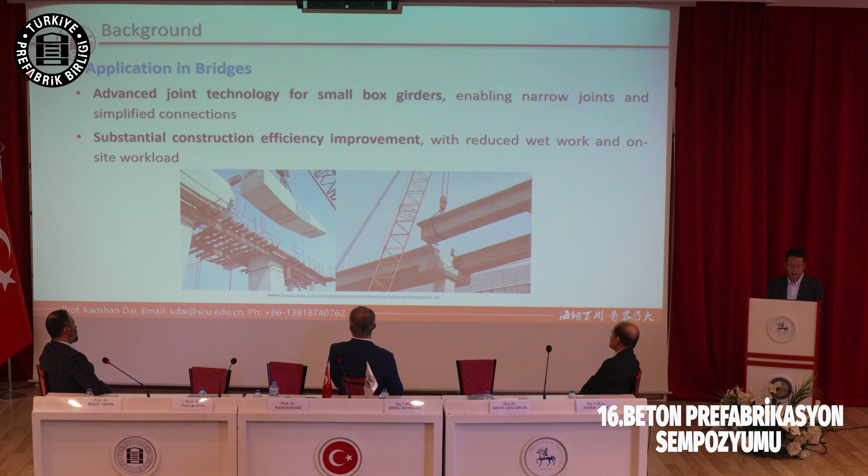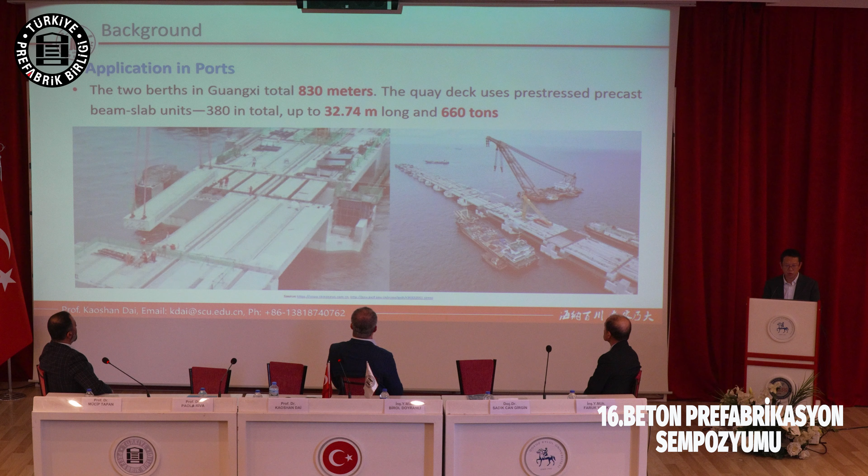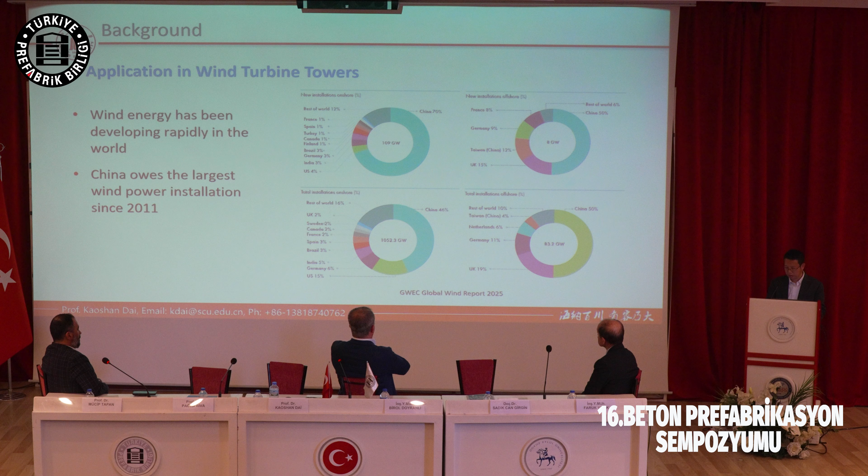And besides buildings, prefabricated concrete is actually used widely for transportation infrastructure, especially bridges, like very busy roads, especially in cities. They use this technology to accelerate construction on site.

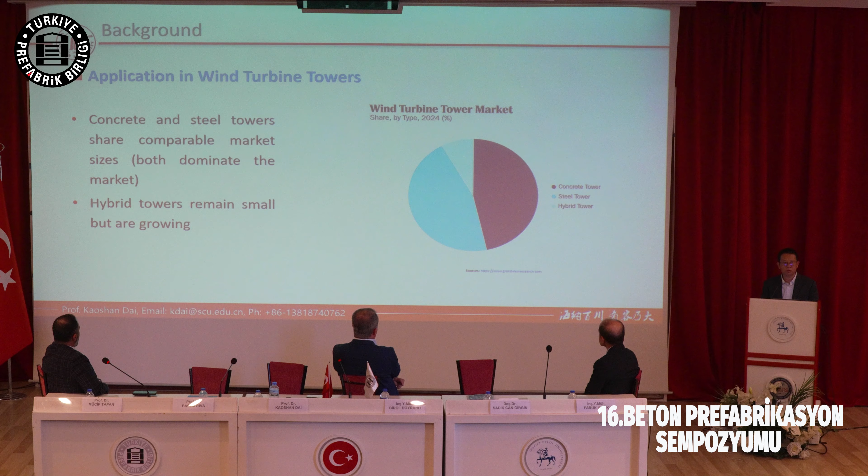And the reason is also that they can save some labor, and they also use this type of heavy crane, since the precast concrete components can be heavy.

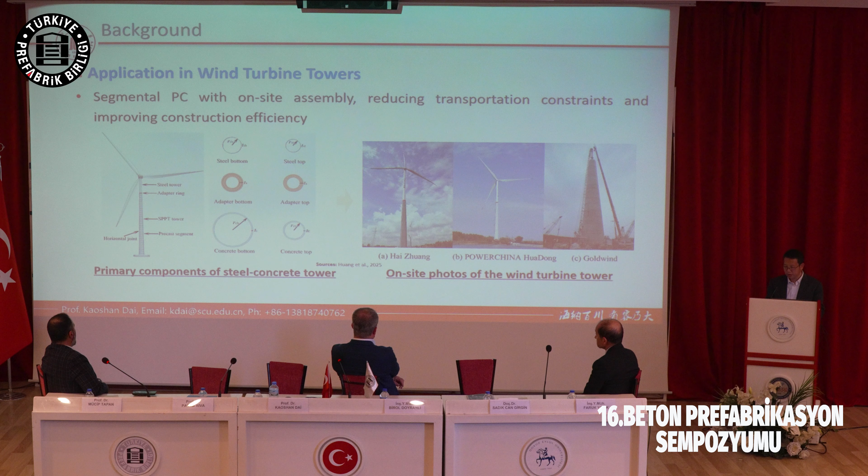I have been working on renewable energy infrastructure since I came back from the US and joined Tongji University in China in 2011. Actually, in that year, China became number one in the world for wind power installation. And this is a report from the Global Wind Report last year.

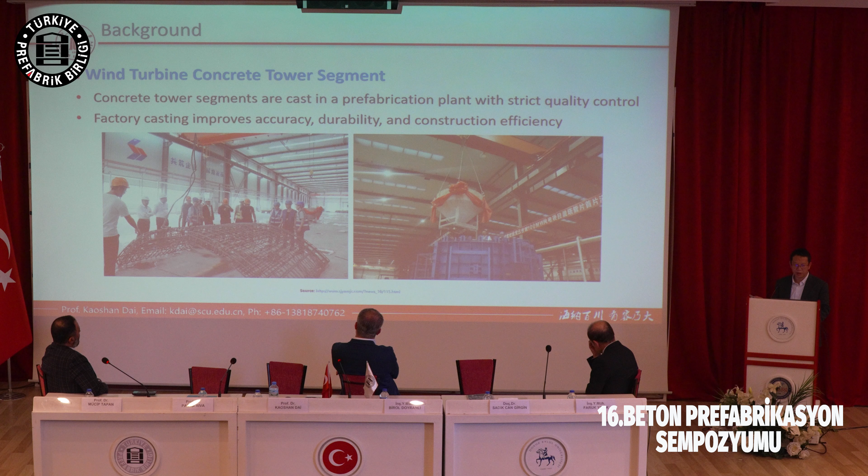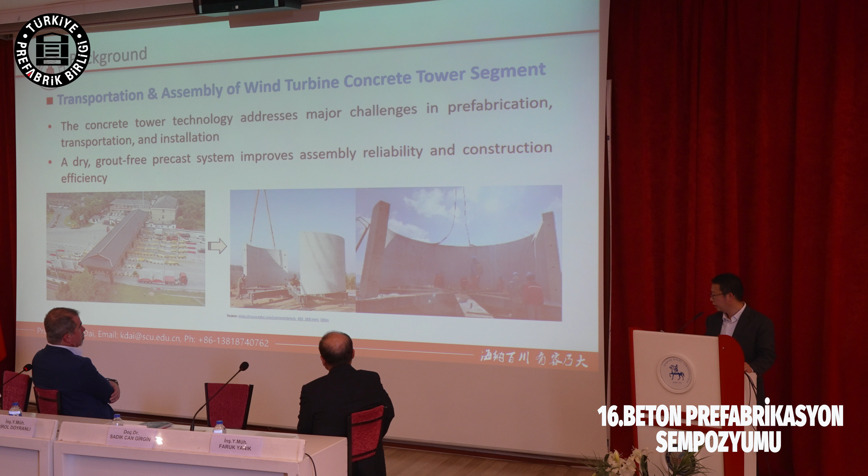And you can see from this figure, for both onshore and offshore wind energy, China has almost half of the world capacity. I studied this type of structure; at the beginning it was a steel tubular structure. And currently, as you can see from this figure, concrete towers have almost a comparable market share to steel towers.

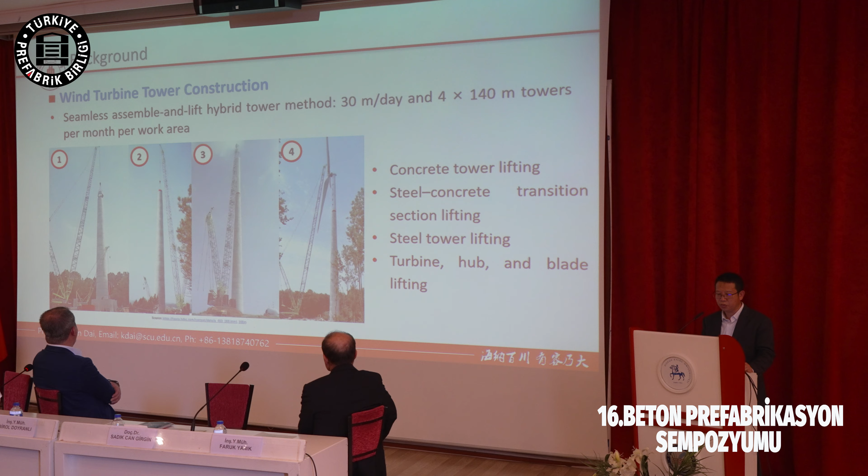The reason is the concrete tower is very cost-effective. That means it's very cheap compared to steel in China. And so when the building market for precast concrete went down a little bit, a lot of manufacturers switched to this type of renewable energy infrastructure. So their factories can still be fully operated, but the product will be like this, okay?

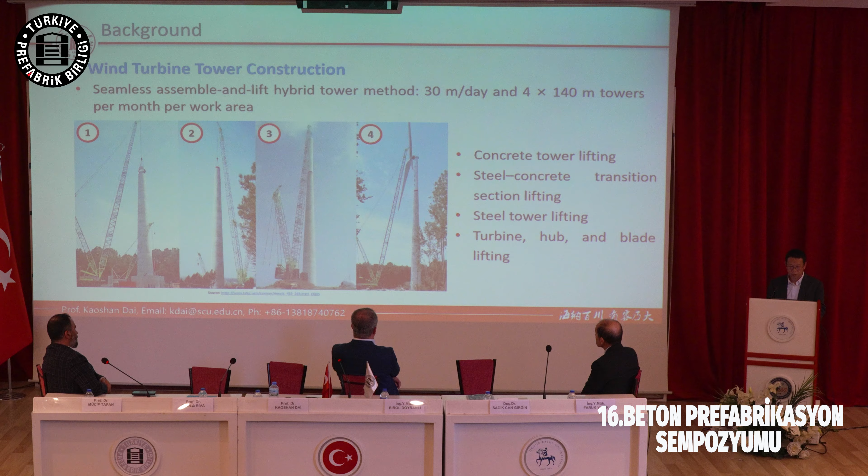So for the wind turbine tower, usually they'll have concrete at the bottom, almost 2/3 of the length of the tower, and at the very top they'll keep the steel.

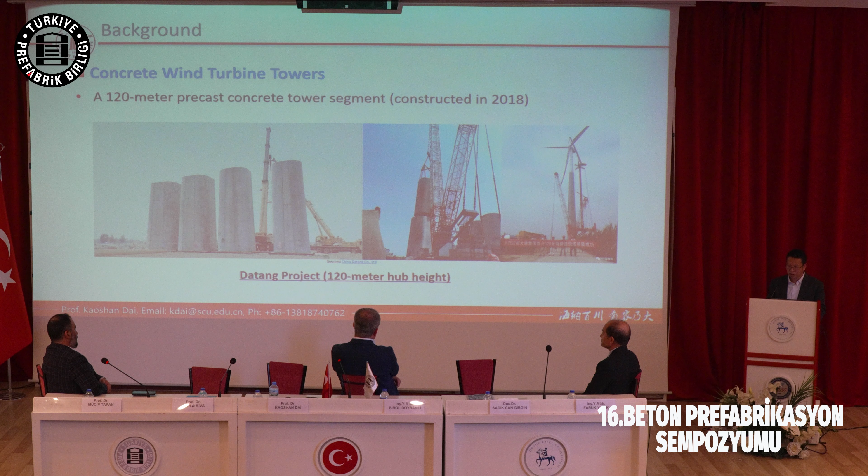And then between the steel and the concrete, there's a connection between them. And you can see from this figure, the construction still uses a crane. And this is a manufacturer or factory place.

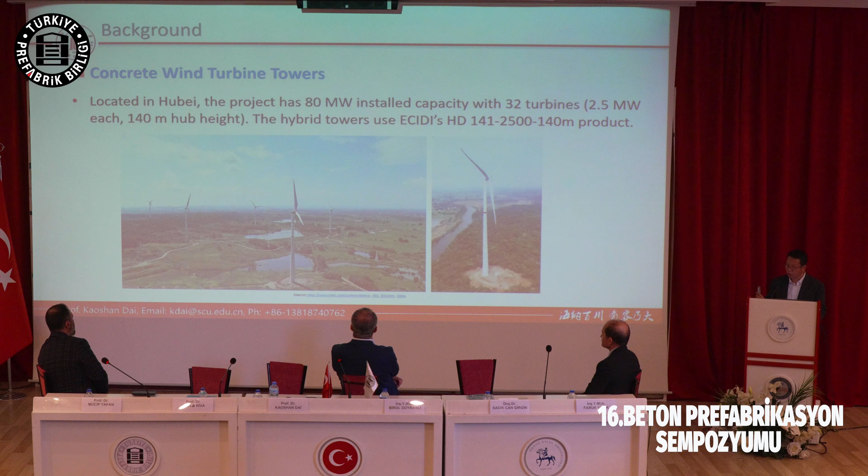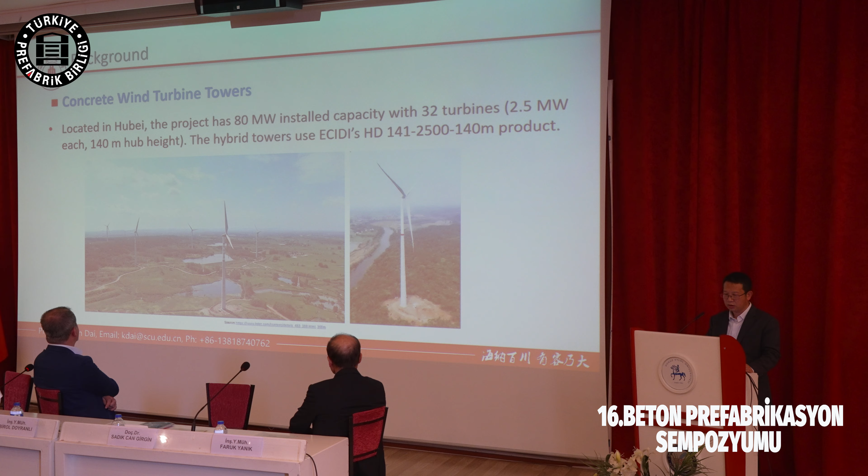And some of the companies' previous product is usually for the metro line tunnel, but with this requirement going down in China for metro line construction, they also use a different mode and try to manufacture this wind turbine concrete segment. And this is transportation and also the construction on the site.

At the very beginning, this technology, I think, was originally from a European country like Spain, but China right now has developed at least 10 types of structural system for the concrete part of the wind turbine. And they mostly will be precast and pre-stressed.

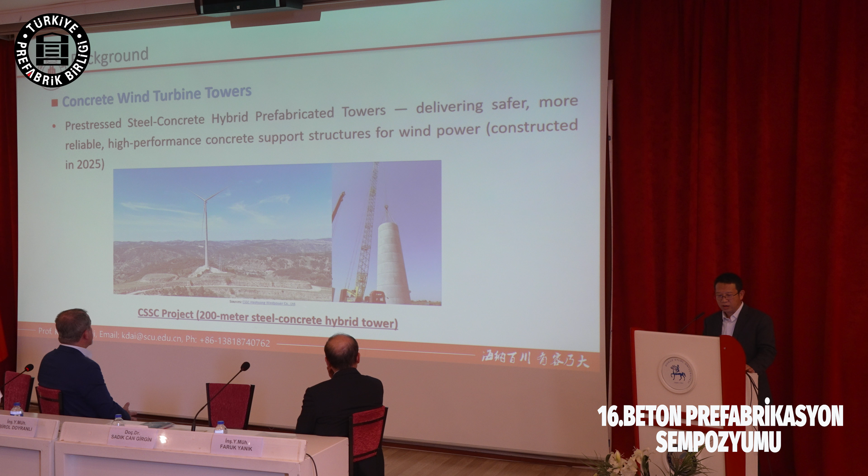This is the on-site assembling steps. Usually first you have the foundation, and then you use the crane to lift the concrete part, and then the steel part, and finally your turbine machine, hub, and the blade.

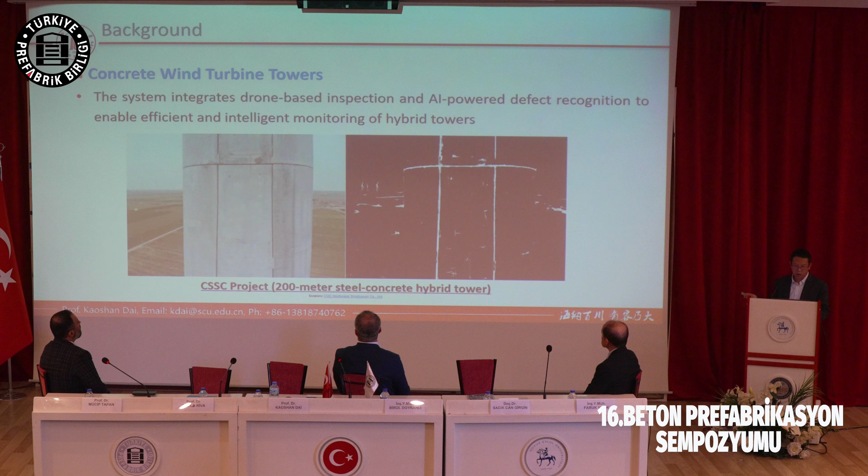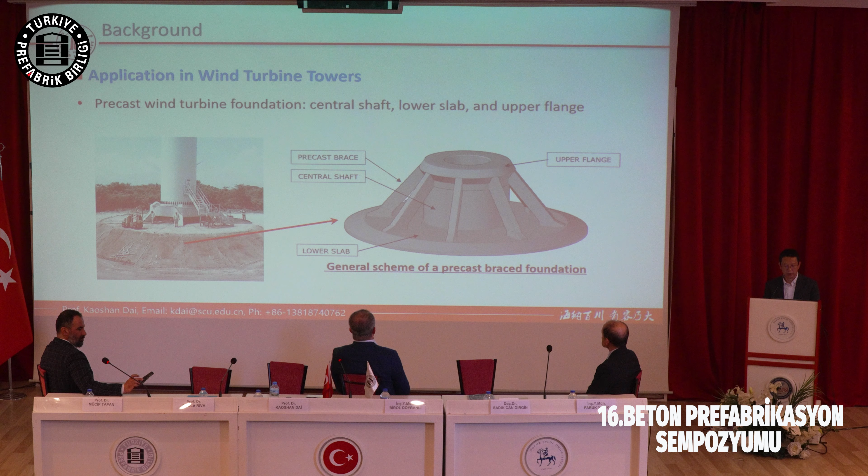Okay. At the very beginning, the tower concrete part is not a circle. It's rectangular at the beginning. This is one of the first, at 2018, 120 meters tall at the hub. The hub means from the bottom foundation until the turbine machine itself. So this is one of the tallest at 2018.

But you can see the cross section of the tower is not a circle; it's rectangular. Then different companies developed their own structural systems, and this is one of the projects with 32 turbines in one wind farm with 140-meter hub height. And the tallest one currently in China is from last year. We have the 200-meter hub height, and this is the tallest currently in China.

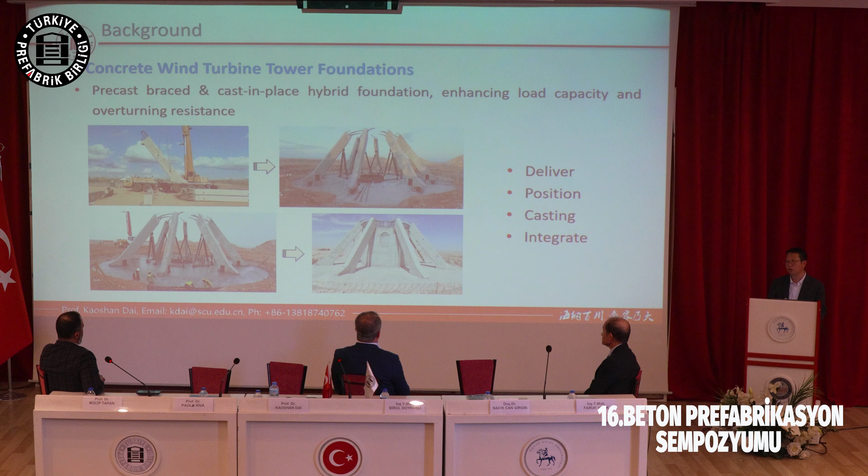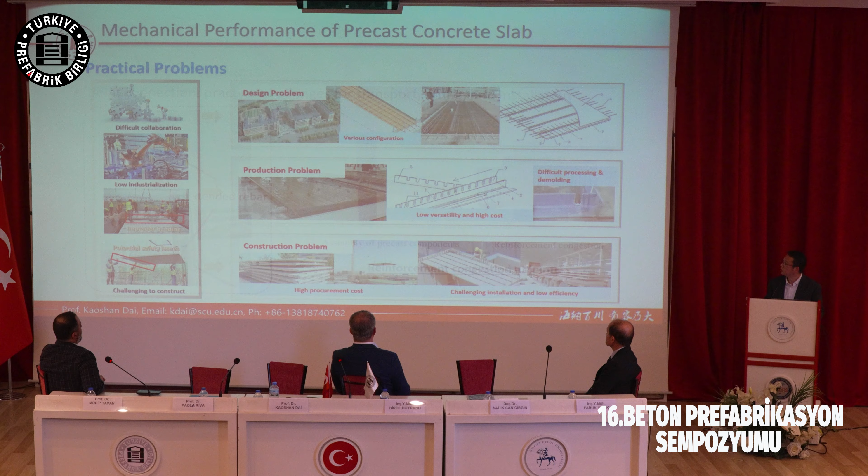Actually, at the conference break, I contacted one of the biggest wind turbine manufacturers. Goldwind is number one in the world. It's a Chinese-owned company, and they actually got 2 contracts in Turkey, and they'll start a blade factory in Izmir, I think in 2027. And this is one of the structures I have been working on for more than 14 years. And for this 200-meter tower, they also have AI-powered defect recognition using drones.

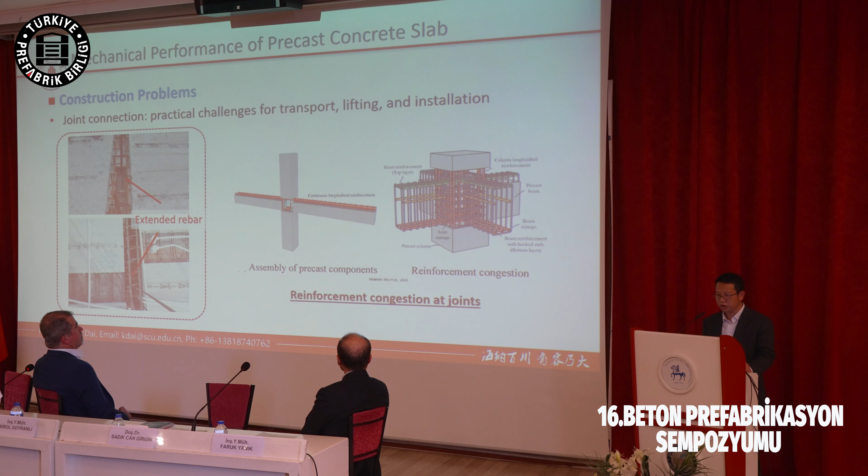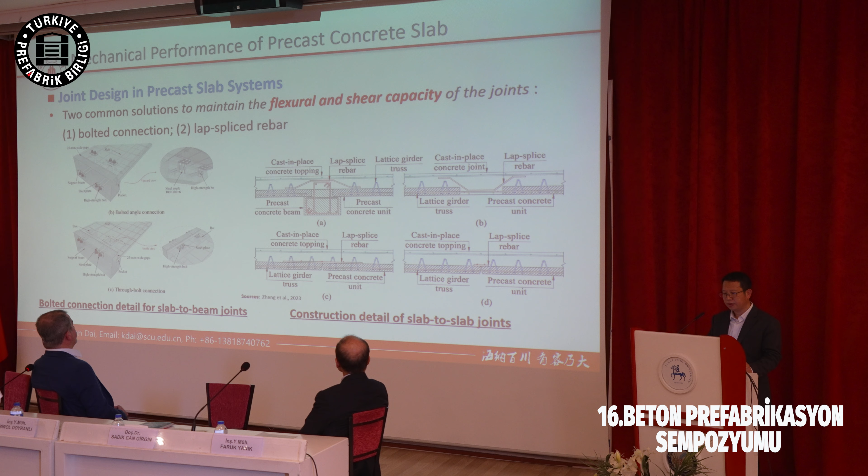Besides the tower, we also use precast concrete for the foundation of the tower, especially for the brace part. You can see here. Usually all these braces are prefabricated, but the bottom is still cast on site, and then they assemble together, and to save concrete for this part, they use the soil as the self-weight.

Okay, so as I said, precast concrete technology in China has developed rapidly since 2000. Of course, the start was buildings, and then we used it widely in bridges, ports, and different structures. And currently, the big market is also renewable energy, especially wind turbines.

So I think probably we can communicate a little bit more after the presentation, because Goldwind told me they probably will use concrete towers also. They'll try this in Turkey, but I told them in this very seismically active region they should be very careful about the connections of the different segments.

Okay, let me go to one of the experiments I did with my student, with one of our industry partners. They raised the issue that for those buildings, when different parts are put together, they usually leave extended bars for the floors or for the beam-column connections. One of the problems, they told me, is transportation. During transportation, some of these extended bars will be bent or hit, and it complicates transportation.

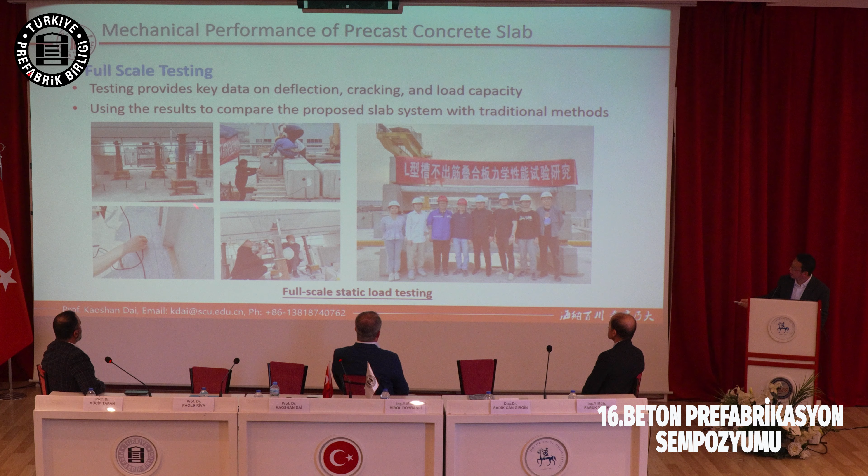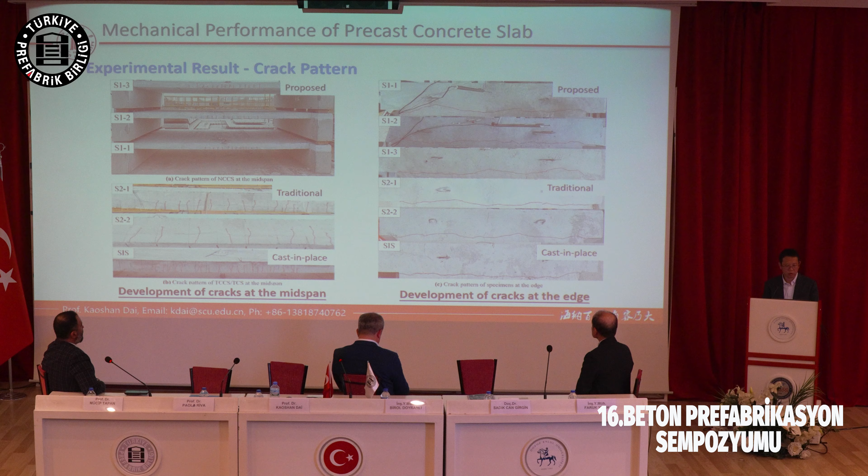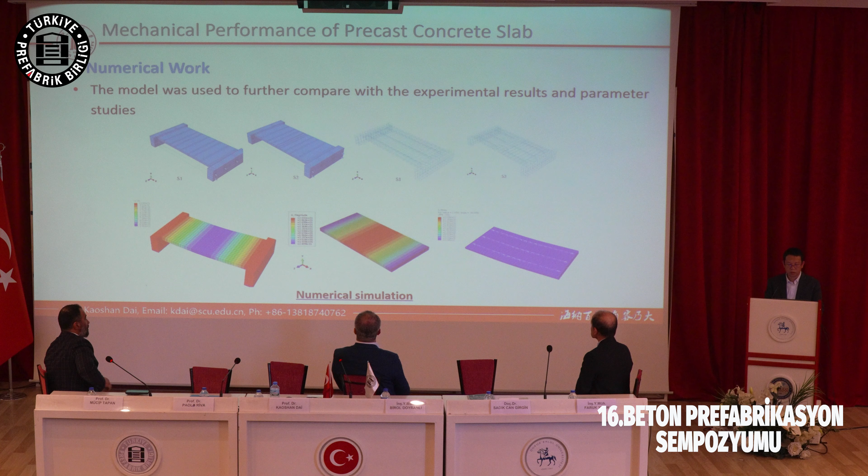During the simulation or during the preliminary discussion, we think it should be safe, but there's difficulty they'll meet during transportation and construction. So to validate the concept, we work together to do full-scale testing to see the performance, if we use this kind of connection compared to the traditional one with extended rebar, and whether there will be a change in structural performance.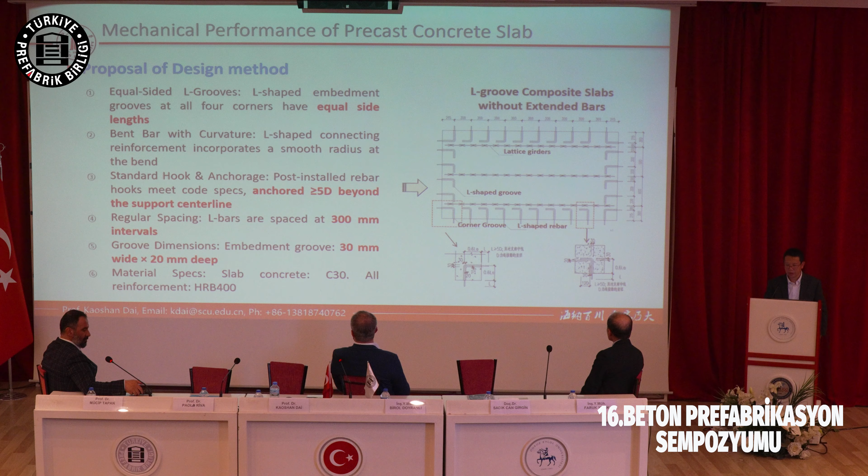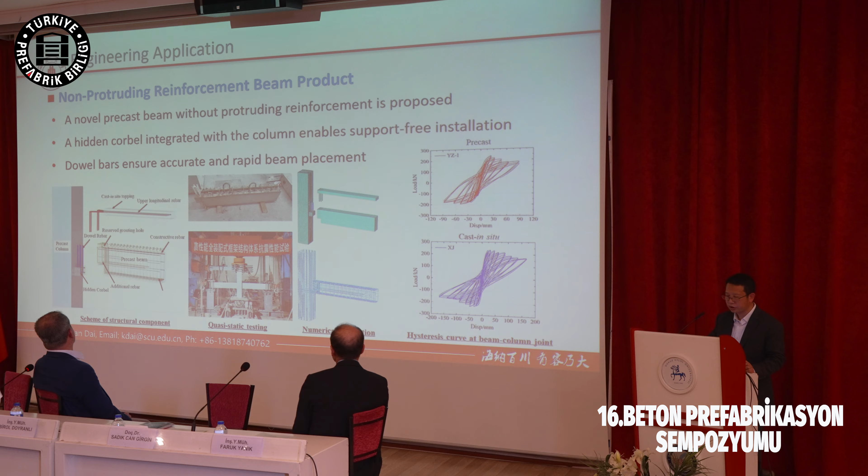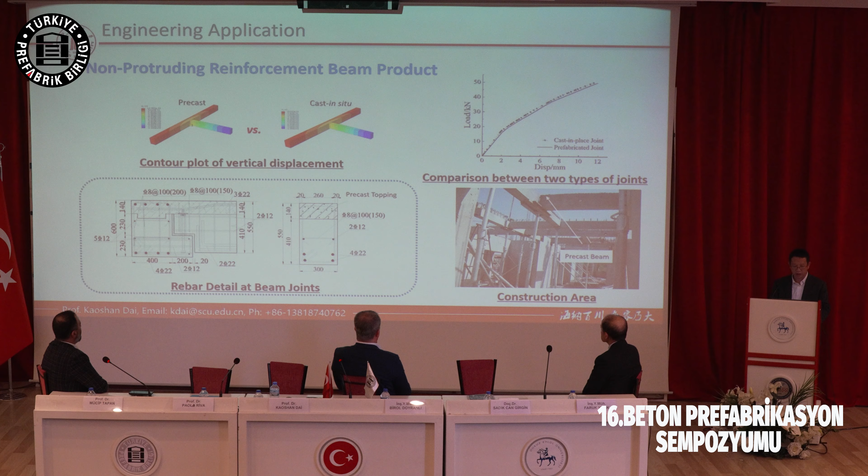And actually, in the test, we put it pretty a little bit high so we can go downstairs to observe the crack development.

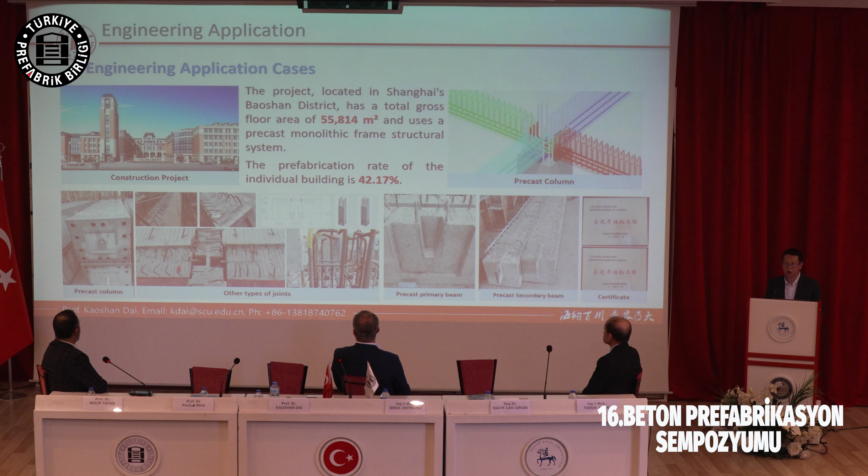And for the crack pattern, we compare our proposed connection type of slabs with the traditional one and also the cast-in-place one, and there's no big change.

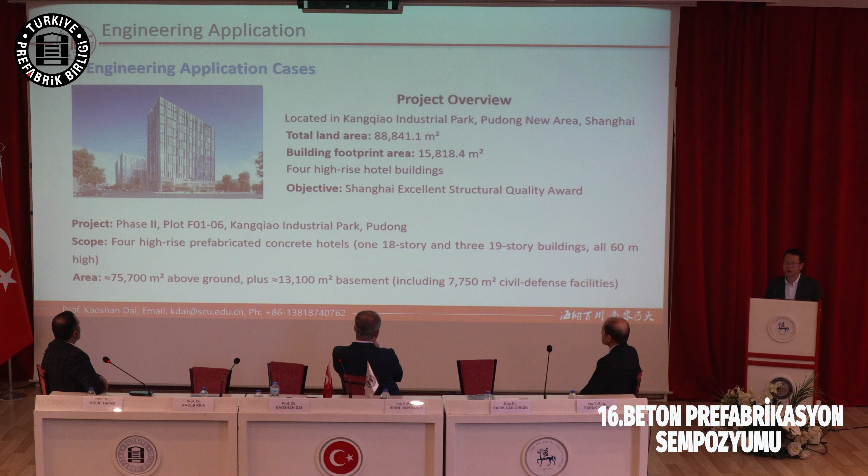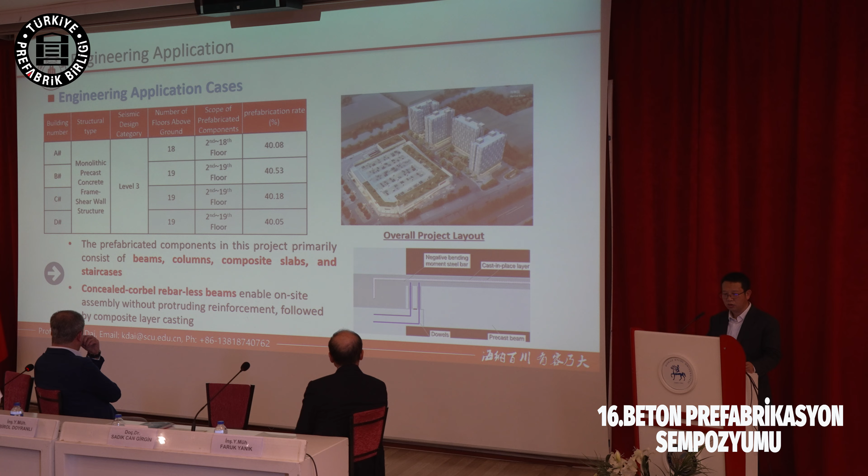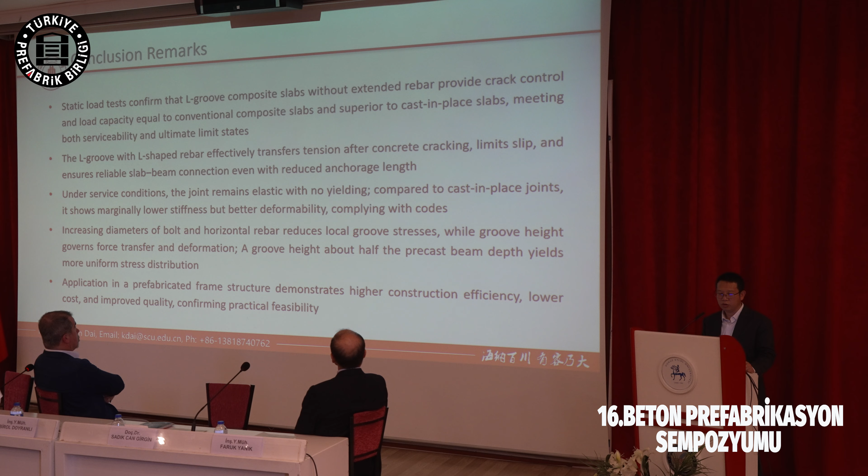And through this experimental and numerical work, of course, this is for a slab. Also, we propose a similar thing for the column and beam connection. Due to the time reason, I will not introduce the detail of the column and beam connection.

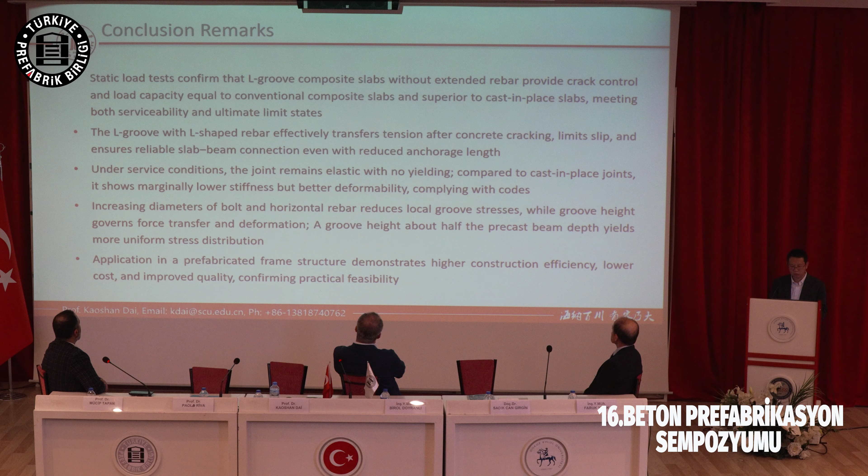Let me go to the engineering application for this technology. As I said, besides the slab, we also propose a similar connection system for the beam and the column. We also did some lab testing and numerical work, and with all this, we use all the technology adopted in different real engineering projects.

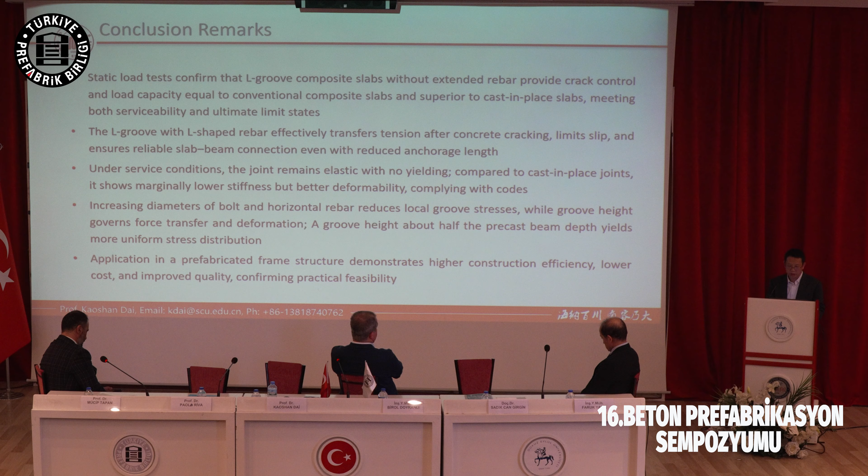Okay, let me keep it short for the conclusion. I presented a little bit of the precast concrete technology we use in China for, of course, residential and industrial buildings, but I also introduced bridges, especially the wind turbine tower.